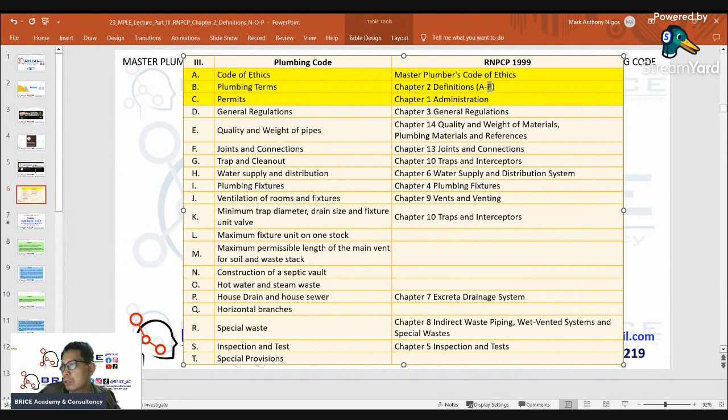Okay, N-O-P, letter N: NAMPAP, National Master Plumbers Association of the Philippines. Nuisance includes, but is not limited to the following: any public nuisance known in common law or in equity jurisprudence; whenever any work regulated by this code is dangerous to human life or detrimental to health and property; inadequate or unsafe water supply and/or sewage disposal system.

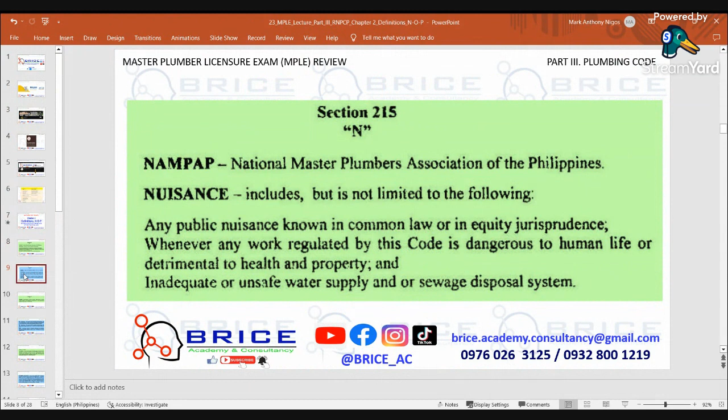That's it. Next: Oakum, hemp or old hemp rope soaked in oil or tar to make it waterproof.

Occupancy: the purpose for which a building is used or intended to be used. The term shall also include the building or room housing used. Change of occupancy is not interpreted to mean change of tenants or proprietors.

Offset: in a line of piping, is a combination of elbows or bends which brings one section of the pipe out of the line but into a line parallel to the original section.

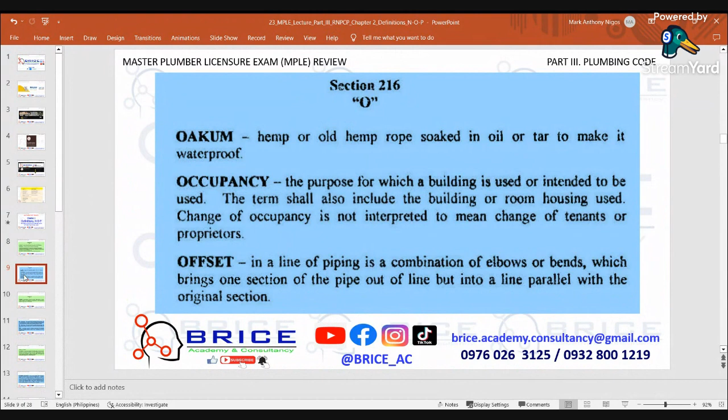P. Person: a natural person, includes heirs, executors, administrators, or assigns, and also includes a firm, partnership, or corporation, its or their successors, or assigns or agents of any of the aforesaid.

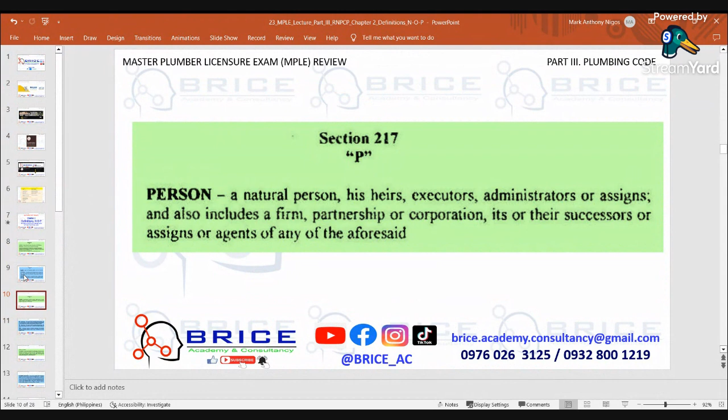PB, polybutylene: tube made of plastic material and colored black. The cross-sectional shape is normally oval and is denoted by its outside diameter, or OD. Normally used as water service connection from main to water meter.

PE, polyethylene: tube made of plastic material and colored black. The cross-sectional shape is circular and is denoted by its outside diameter, or OD.

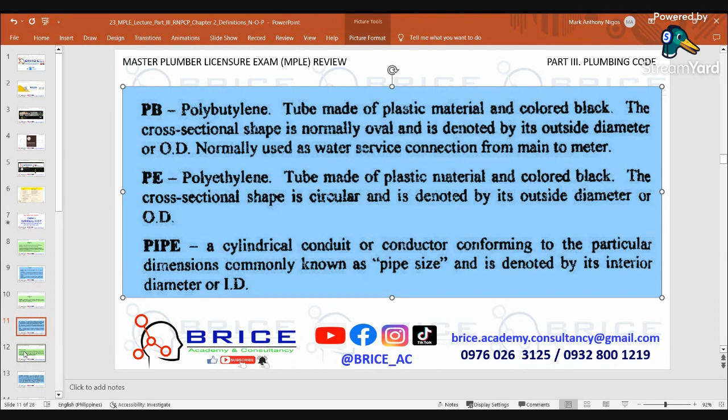Plumbing: the art and technique of installing pipes, fixtures, and other apparatus in buildings for bringing in the supply of liquid substances and/or ingredients and removing them, such water, liquid, and other carried waste hazardous to health, sanitation, life, property; also the pipes and fixtures after installation.

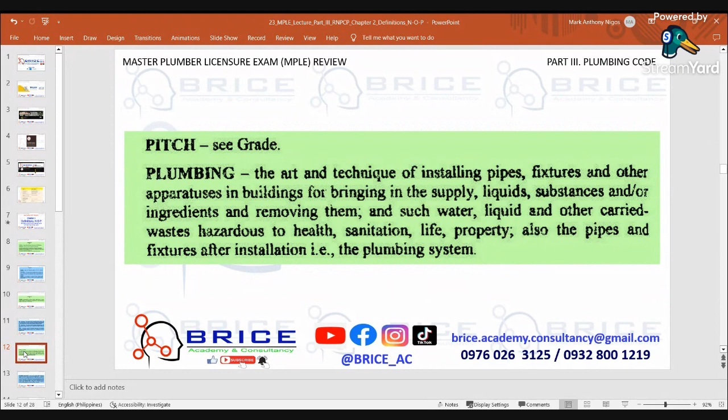Example, the plumbing system. Plumbing appliance: any one of a special class of device or equipment intended to perform a special plumbing function. Its operation and/or control may be dependent upon one or more energized components, such as motors, controls, heating elements, and pressure temperature sensing elements.

Such device or equipment may operate automatically through one or more of the following actions: time cycle, a temperature range, pressure range, a measured volume or weight, or the device or equipment may be manually adjusted or controlled by the user or operator.

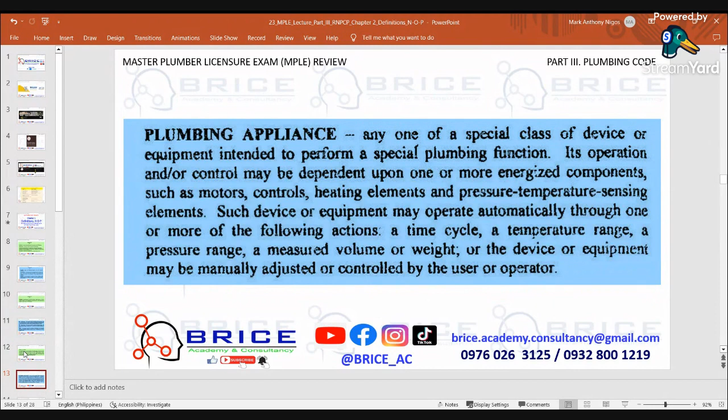Plumbing appurtenances: a manufactured device or prefabricated assembly or on-the-job assembly of component parts that serves as an adjunct to the basic piping system, plumbing fixtures. An appurtenance demands no additional water supply, nor does it add any discharge load to a fixture or the drainage system.

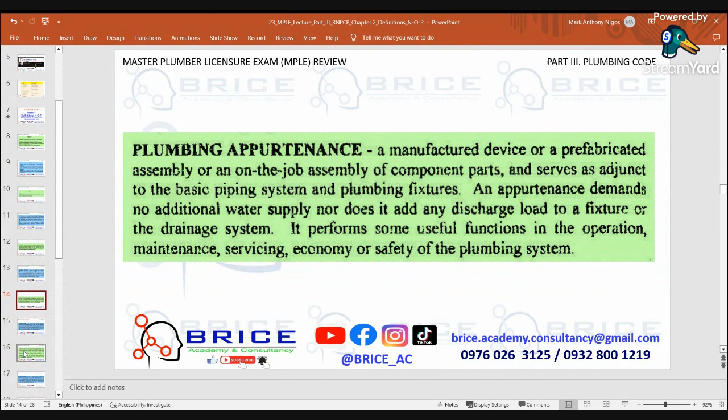It performs some useful function in the operation, maintenance, servicing, economy, or safety of the plumbing system.

Plumbing firm: sole proprietorship or corporation composed of registered and licensed master plumbers together with allied professionals, with the master plumbers composing the majority of the membership, incorporators, directors, and/or executive officers. Licensed master plumbers only render work and services within the cognizance of a registered master plumber, and members of the allied professions also render work and services within the cognizance of their respective professions.

Plumbing fixtures are approved-type installed receptacles, devices, or appliances supplied with water or receiving liquid or liquid-borne waste, and discharge such waste into the drainage system to which they may be directly or indirectly connected. Industrial or commercial tanks, vats, and similar processing equipment are not plumbing fixtures, but may be connected to or discharge into approved traps or plumbing fixtures as provided for in this code.

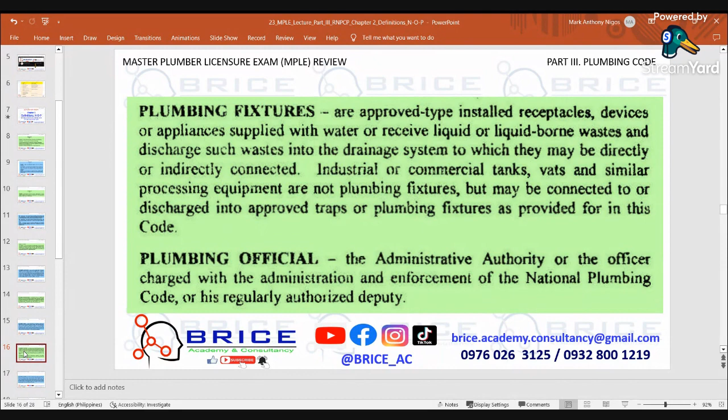Plumbing officials, the administrative authority, or the officer charged with the administration and enforcement of the National Plumbing Code, or his regularly authorized deputy.

Plumbing system includes all potable water supply and distribution pipes, all plumbing fixtures and traps, all sanitary and storm drainage systems and pipes, roof drains, leaders and downspouts, and all building drains and sewers, including their respective joints and connections, devices, receptacles, and appurtenances within the property water lines in the premises, potable tap, hot and chilled water pipings, potable water treating or using equipment, fuel gas piping, water heaters, and vents for the same.

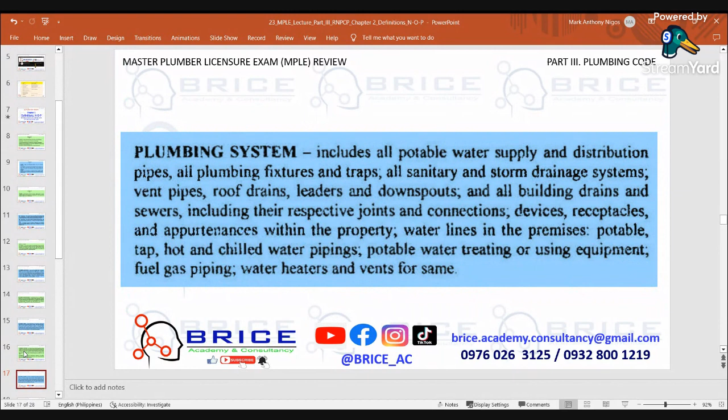Plumbing unit: minimum standard quantity of plumbing fixtures that discharge waste to a plumbing installation, including one water meter, one water closet, one lavatory, one shower head and drain for a bathtub or shower stall, one kitchen sink, one laundry tray, three floor drains, and four faucets or hose bibbs.

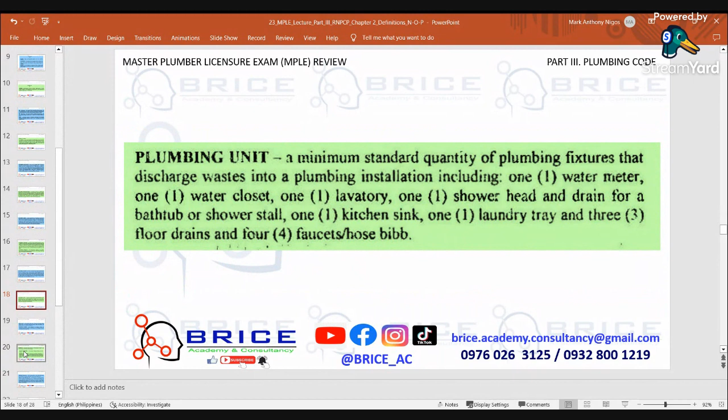Pollution: an impairment of the quality of water to a degree which creates hazard to the public health and adversely affects the aesthetic and potable qualities of waters for domestic use.

Potable water: water satisfactory for drinking, culinary, and domestic purposes and meets the requirements of the Philippine National Standards for Drinking Water.

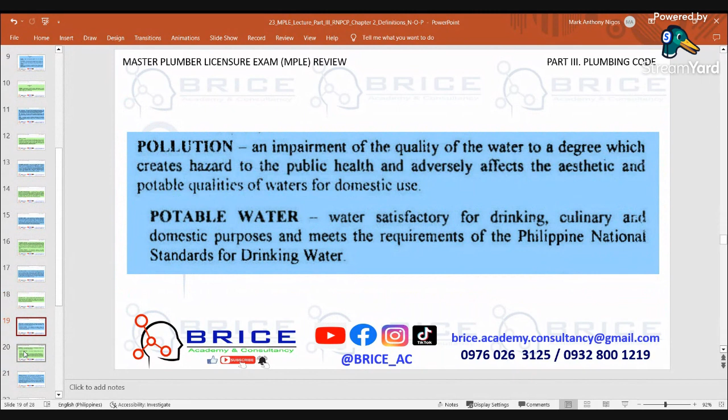Pressure: the normal force exerted by a homogeneous liquid or gas per unit of area on the wall of the container.

Static pressure: the pressure existing without any flow motion.

Residual pressure: the pressure available at the fixture or water outlet. Allowance is made for pressure drop due to friction loss, head, meter, and other losses in the system during maximum demand period.

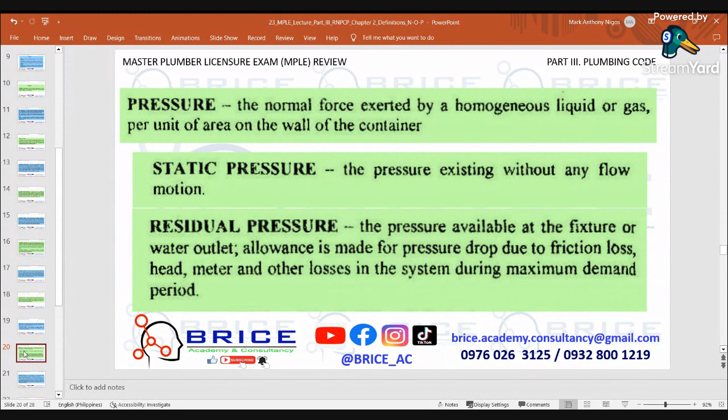Primary branch of the building drain is the single sloping drain from the base of a stack to its junction with the main building drain.

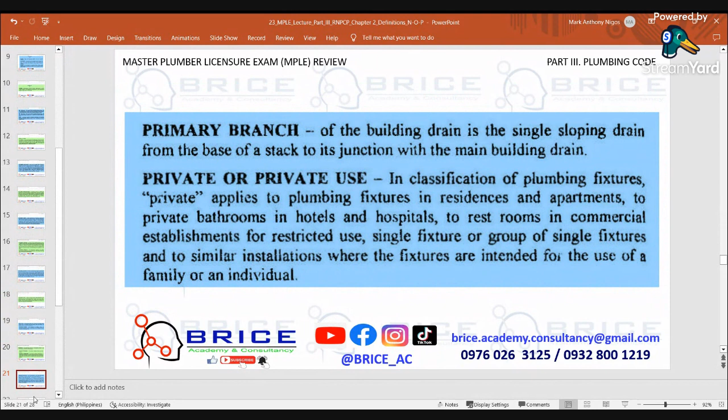Private or private use, classification of plumbing fixtures: private applies to plumbing fixtures in residences and apartments, to private bathrooms in hotels and hospitals, to restrooms in commercial establishments for restricted use, single fixture or group of single fixtures, and to similar installations where the fixtures are intended for the use of a family or an individual.

Private sewage disposal system: septic tank with the effluent discharging into a subsurface disposal field, into one or more seepage pits, or into a combination of subsurface disposal field and seepage pit, or of such other facilities as may be permitted under the procedures set forth elsewhere in this code.

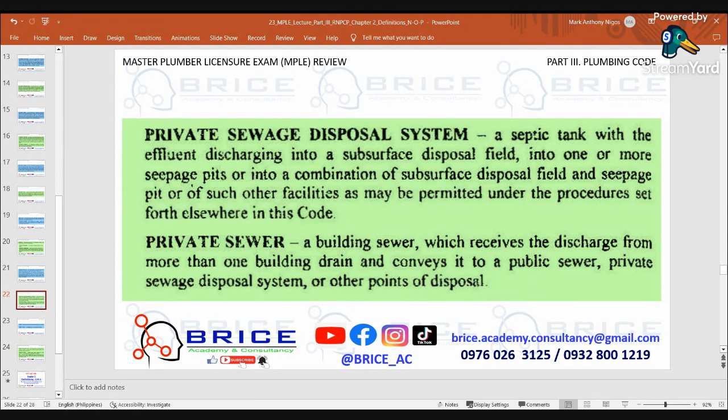Private sewer: a building sewer which receives the discharge from more than one building drain and conveys it to a public sewer, private sewage disposal system, or other points of disposal.